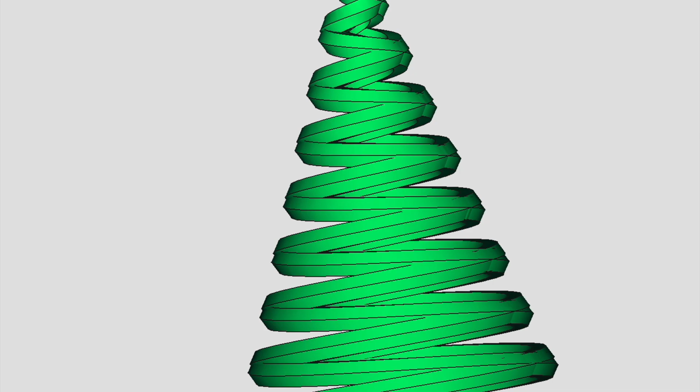We are in the wonderful world of FreeCAD and we're going to make a tree, a Christmas tree. I know it's the 18th of December, so this might be a bit late for some people, but maybe next year. In any case, the idea here is to design something, take a concept, show you that you can just do it in FreeCAD fairly simply, and then have it in your hands within a couple of hours, depending on the speed of your printer.

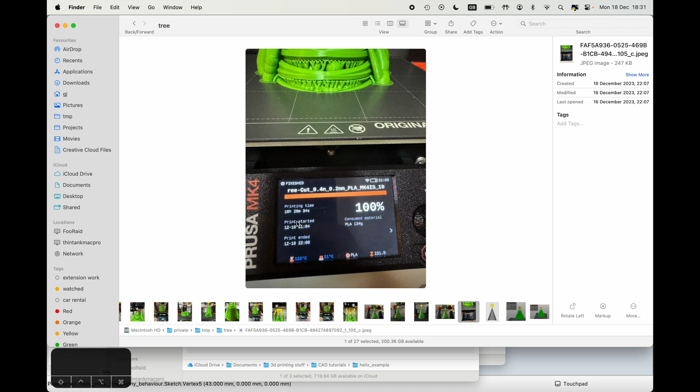I'm going to show you what we're going to end up with. Here we have the wonderful world of Christmas trees. This is what it looks like on the bed of the printer. Let's go back—this is what it looks like in FreeCAD once it's done. You notice the line there, that means we're going to have to sink it into the bed, but we'll get there. This took me 10 hours to print, but it's such a beautiful model.

I just want to share it with people. This is the last stages where the filament change has happened—you can tell that here and here and here. These are the supports, and then we end up with this monstrosity. Once you clear it up, this is me starting to clear up the bottom of it, and it looks beautiful. You end up with loads of supports, so if you can recycle that, that would be lovely. But this is what we're going to end up with, so I think you're going to love it.

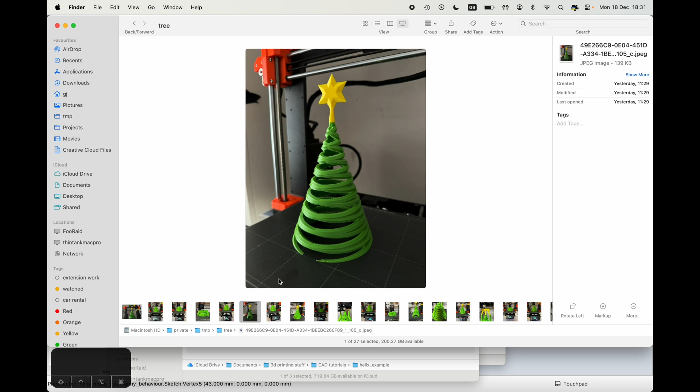So let's go back to the beautiful world of FreeCAD. I'm using FreeCAD 0.22, the dev version—it's a nightly build. At the time you're watching this, you might already see the latest, greatest version, so you might not need to download it from a nightly build repository. Essentially what we're doing in this tutorial, you can do on 0.21 and onwards. It's going to look mostly identical.

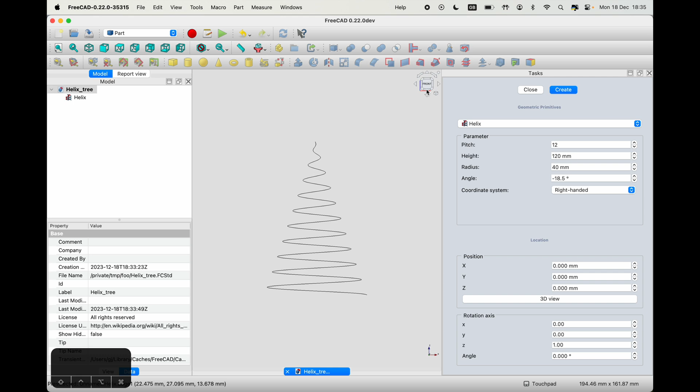So we're just going to create one. And there we go, we have our helix. Almost looks like the finished product, doesn't it? If you look from the front, this is what it looks like. The, 1, 2, 3, 4, 5, 6—no, I can't count. Anyway, I'm going to leave counting to you, but let's just assume that FreeCAD is not wrong in this case.

In any case, you just have to play with these parameters. What's great about this tool is it stays open. There's a bit of UI inconsistency in FreeCAD, but what can you do? It's free, it works. This allows us to create multiple of these without closing or having to reopen and re-enter all the parameters.

So I've created one that's right-handed. Now we want to create one that's left-handed. So let's do the same thing and say create. And voila, we have two of these.

I'm just going to move this out of sight. I'm going to change the line color to, let's make it green, because it's a tree, right? There we go. So we have two of them.

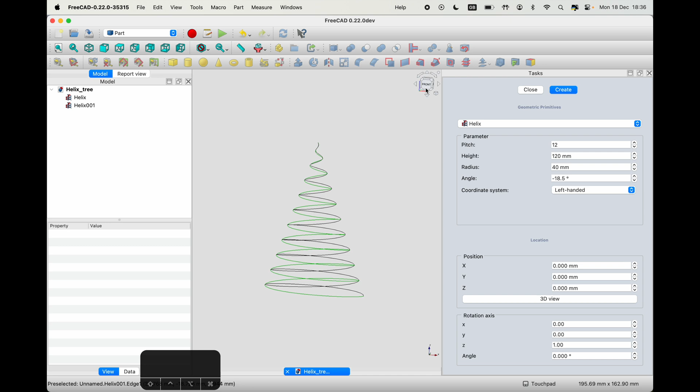If you look from the front, it kind of looks confusingly the same, but if you look around, we can clearly see that we have two helixes. And in the object tree, we have two helixes as well.

So we're going to close this workbench. We're going to save because we like to keep our projects. I'm going to go back to the front. And the next thing we're going to do is sketch a hexagon.

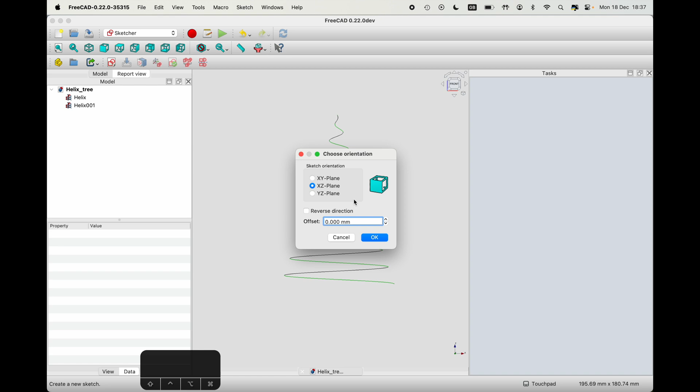So we're going to go to the Sketcher. There we go, thank you. We're going to say we want to create a new sketch, please. And we're going to create it on - you can't see it probably, but there's a little Z and a little X - so we want it to be on the ZX plane, or XZ plane. Thank you, and here we are in the magical world of the ZX plane.

If you didn't get that joke, I'm just going to explain it. Anyway, you get it now, right?

I hope so. This is going to be a shape that's going to basically follow these two helixes. And you can honestly do whatever you want. If you're doing it yourself, be creative. Don't just do what I'm doing, try something different. And in any case, this is CAD, and we can always go back and change things, which is exciting.

But for my example, I'm just going to go with, let me think - I think I'm just going to go with a hexagon because it's a bit more symmetric. But again, be creative. I think I did a star once, which is basically two triangles, but let's go with hexagon.

I'm going to put our hexagon in there somewhere, about 40 millimeters to the right, and we're going to make it a 3 millimeter radius. For the angle, we're going to say 0. There we go, and we have a little hexagon helix. We already have a helix or two.

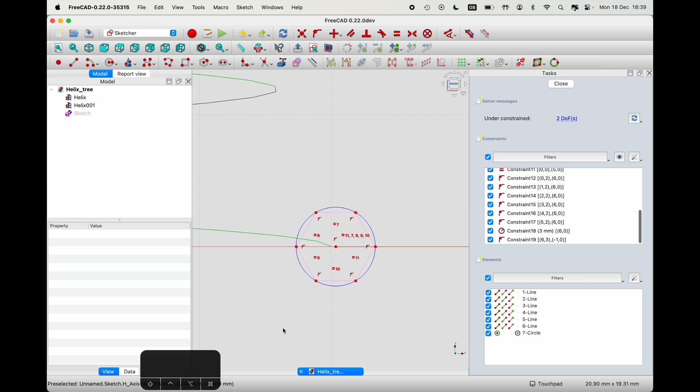But it's still complaining that it's under-constrained, and I like for things to be constrained. So let's go to the bottom - is this constraint on the axis? It is. So that was a redundant constraint. Control Z to take us out of that.

Okay, the next thing is going to be a dimension. How far is it from the center? This is, if you're using previous versions of FreeCAD, something different - if you look at the top row, I'm just going to pop that in. 40 millimeters is what we want.

Thank you. These constraint or dimensioning icons look different - they've been a bit more organized in this new version, which is something I love. Another difference you might recognize is the task panel is actually on the right-hand side. You can do that in previous versions of FreeCAD, but you have to set that up, whereas it's the default in the new one, and I actually kind of like it.

Anyway, going back, so we've positioned it 40 millimeters to the right. Why is it complaining then? What can I do? Oh, I can still rotate it. Oh, that's not good. So there are multiple ways to go about it - you can either take one of these points and restrict them to be on the line there.

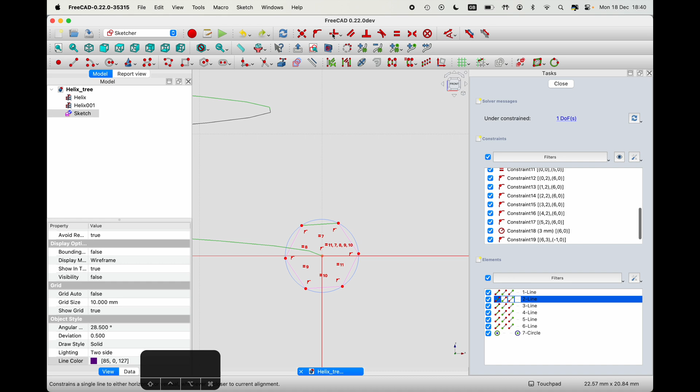But what I like to do is take one of the lines and make it parallel, or horizontal - so let's make it horizontal. In this case, this is one of the changes, it's going to make it whatever's closest, right? So, bloop, and there we are - it is now fully constrained. So we have our lovely hexagon, and we have our lovely tree.

Let's just make a shape. Well, actually, before we do that, I need to duplicate this sketch because we're going to have two helixes, right? So it's quite easy. Copy, Command C, and Command V copies and pastes. Obviously, on your platform, I'm on Mac OS, this might be different, might be Control C, Control V, whatever. Or you can use your menus, but it's much quicker to do things with the keyboard shortcuts. It's the mega user, ultra, uber user way of doing things.

So let's hide two of these because we don't need to see all of them. Take a sketch and let's take a helix. Now if we go back to the part workbench, we're going to look for something called lofts, or sweep rather. So let's sweep. We're gonna pick a path, so the helix is our path. Let's press done, and the profile is going to be our first sketch. So let's just push it here and... select one or more edges from the single object.

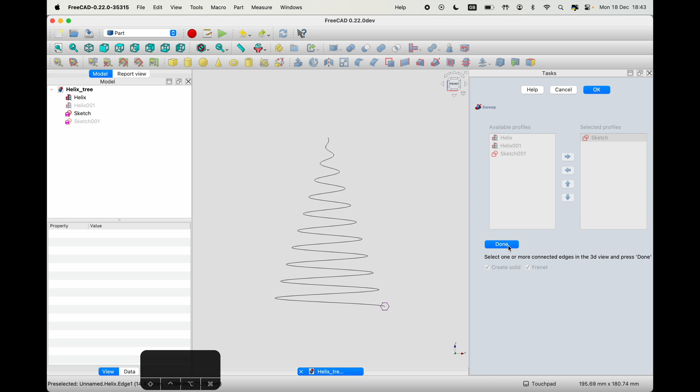What did I do? Oh, we're going to create solid as well. Is anything happening below? We did pick a path, we said yes, we say okay. A bit of trial and error. Workbenches are a bit inconsistent when it comes to UI in FreeCAD between workbenches and some of the tools, but trial and error, right? Let's save this, we have our first sweep.

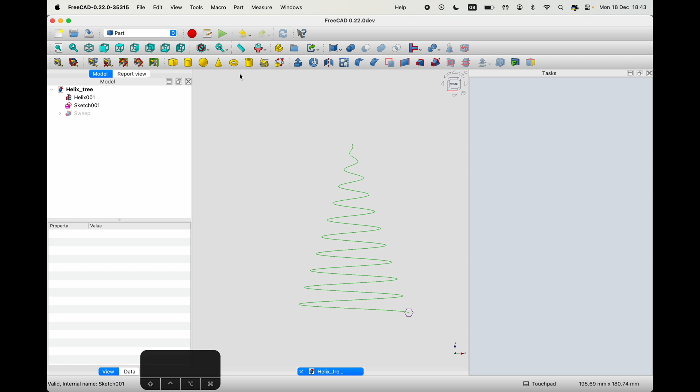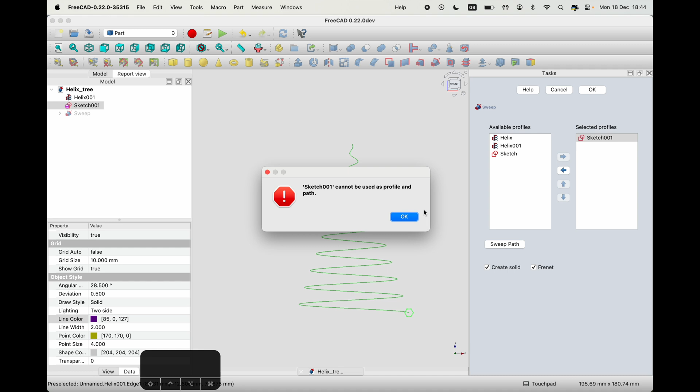Let's hide this for now because we don't want to see it. It's obviously at the bottom now because that's the latest item. Inside of it, we have Helix and Sketch, which are still showing. We don't want to see anything at the moment, but we want to show the other Sketch and the other Helix. Let's do the same thing. Let's just select the Helix, select Sweep, sweep the path, yes please. Say done, we want to use the Sketch 1. It looks like we could have used the other one, but let's just do it that way. Create solid, please. Okay, no, sketch cannot be used as a profile and path.

I think you're mistaken, sir. There you go, I'm done. Yeah, yay. I think it just thinks that I've picked both of them, but it doesn't matter. We now have two of them, two little things. And from the right hand side, you can already see that this looks like the tree. In fact, this is pretty much the tree. It's the magic of sweep.

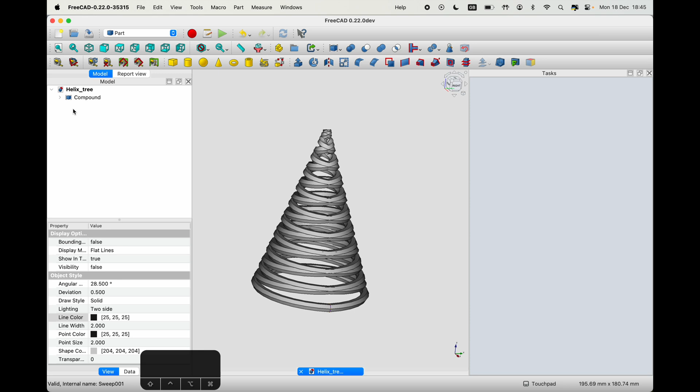Now, I spend a bit of time merging them, and honestly, I don't know if this is going to work. So let's just try it. Compound tools, yes please. Oh, we have a compound. Great, that actually worked the first time. That's never happened before.

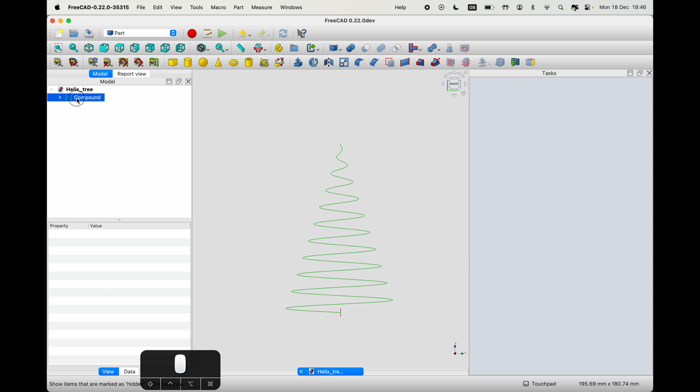What does the Christmas tree need next? Oh, actually, in fact, first the other thing that we want to do is we want to change its appearance. We would like this shape to be green, please. Santa, Santa, please, sir, please. There we go, it's green. That looks better. Now it's entirely up to you if you want to put stars on it or anything else. I'm not going to go that far in this tutorial, but you're free to do whatever you want.

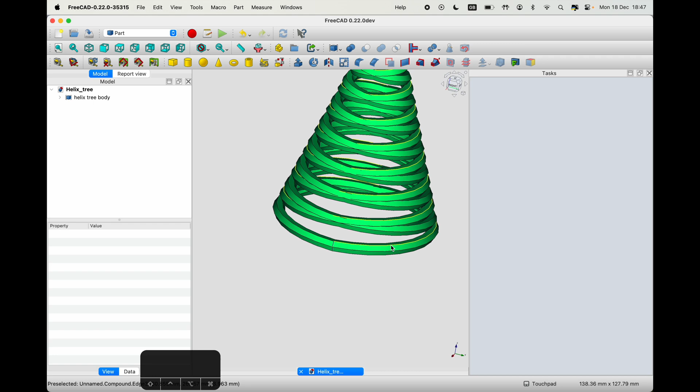Next, we're going to make an STL. So we have our merged helixes, and we have our Christmas tree, festive, unique, and ready for 3D printing-ish. If you're familiar with 3D printing, the problems here are obvious. It's the shallow angles, that's not going to print very well.

However, if we go to a friend, Prusa Slicer, I have one that I prepared earlier in here, and in fact I did a split of it, but this is an STL that I created earlier. You can see that you have to enable support on build plate only, and as soon as you do that, you get loads of support, and I mean loads.

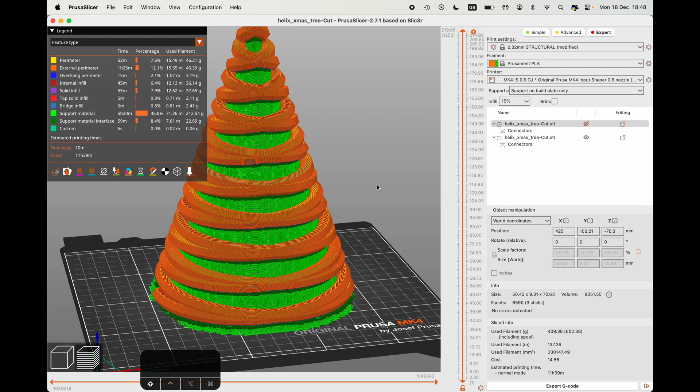This is enabling us to print this, but it creates a bit of waste. Sadly, that's how 3D printing sometimes goes. Anyway, so this is something to look forward to.

But you probably want to see how to make the star, right? Have you ever made a star? Are you a star in the making? Ha ha. For this, let's go to part design.

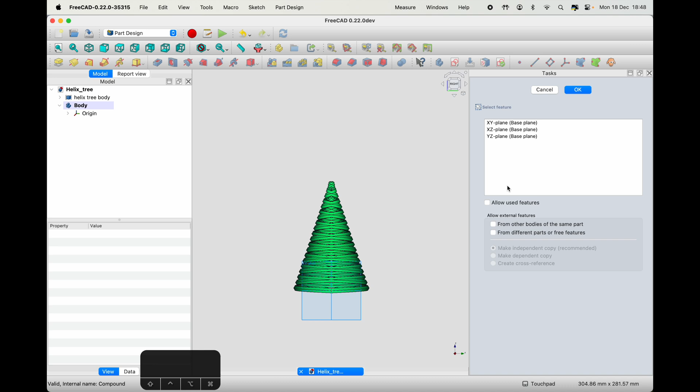And we're going to have a new body. Sometimes it's confusing because things are on the left normally, and now they're on the right. Create body, we want to have a body, and we want to create a sketch. Once again, we're going to have our sketch on this plane, whatever that was, the YZ plane.

Let's close this for now because we want to be able to—actually, let me just rename this to be a star first. And let's reopen our sketch. Here's a great thing: we want to be able to reference the helix underneath to get the height. I mean, after all, this is a parametric design, right? So you should be able to change things.

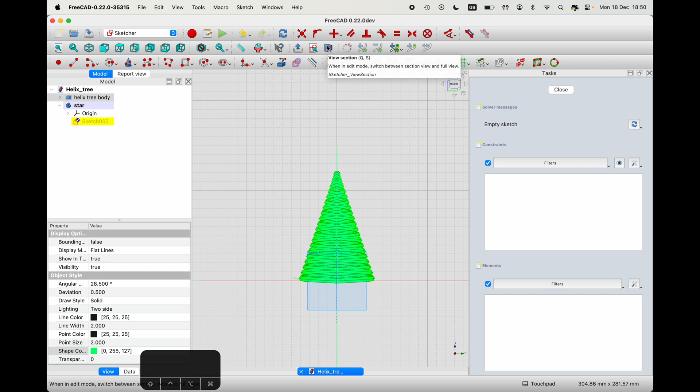Luckily for us, we can do that, if I could just remember which one of the icons enables it for us. I mean, it's not really necessary to do it. I think it's this one, view section. Hey, I found it. It's very helpful to sometimes just hover over things, and you eventually find it. The other way to do it is basically just go via menu.

You notice these letters here, which means we can get to things quicker. But for the purposes of the tutorial, I'm going to try clicking on things just so you can see what I'm doing. Basically, we want our star to be somewhere here, and then we want to have a little cone that basically extends the tree and kind of pokes the star in, and kind of connects everything together. So what shall we start with first?

Let's in this particular sketch just have our little cone. So we're gonna go—how should we do this? This is the bit that I haven't rehearsed. I've done it once, and I think that's enough for me.

Let's make a triangle. Just say we want it to be in the middle, and whatever. Let's just put it there. There we go, thank you. You can change things, right? Actually, we don't want a triangle to be on the circle.

This is a construction circle. You can just select it and then press, in my case, Function and backspace, which is the delete key, and off it goes. The trouble is now this is going to be dancing around.

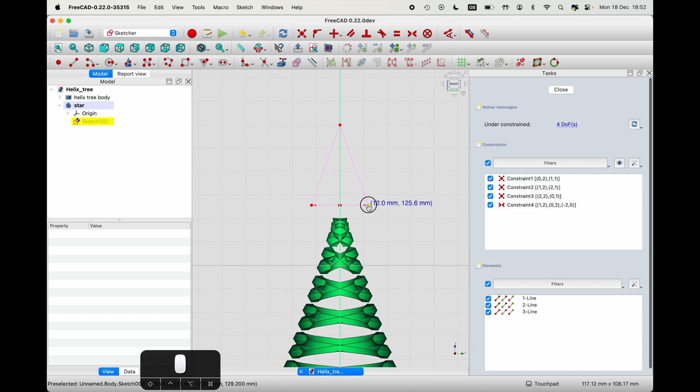So there we go, that's better, that's better. So I don't know if you remember, but we said our height is 120 millimeters. I'll actually forget this, let's not do maths, let's not make things too complicated. We can just say, okay, well, we kind of know that this is going to be.

I don't know what it just did, it just made a constraint that I didn't need. I want to have a distance here. Thank you. So this is telling us 5.8. Are we going to believe it? You can obviously make it whatever you want.

It doesn't have to be a cone, you can make it whatever you need. But we're going to make it a cone in our instance, and we want this to be there, please. And I'm going to constrain it onto the Z-axis as well. There we go.

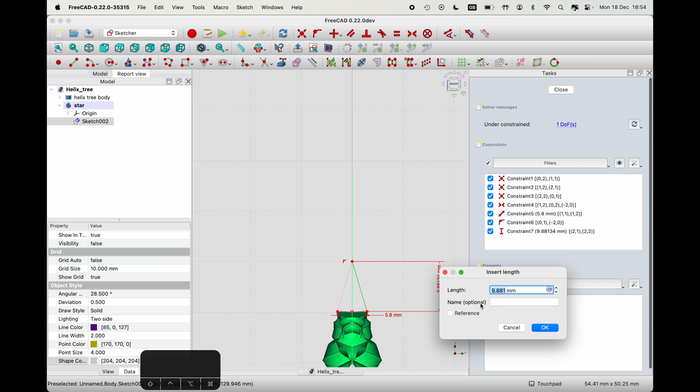Now let's make it this tall. We do want to know the height of it. Let's just make it 10 millimeters tall for now. We can come back to this and change it, but it's useful to have it.

And now, if we take this sketch and do a revolve—not groove, but a revolution, actually it's called here—revolve axis intersects the sketch. That's not good.

Actually, I think I know my issue here. So we've done a boo-boo. If you're watching this and screaming at me, I'm sorry. I'll give you your money back.

Let's put it there, and let's do it there, that's better. This has been constrained. We have to do the dimensioning again.

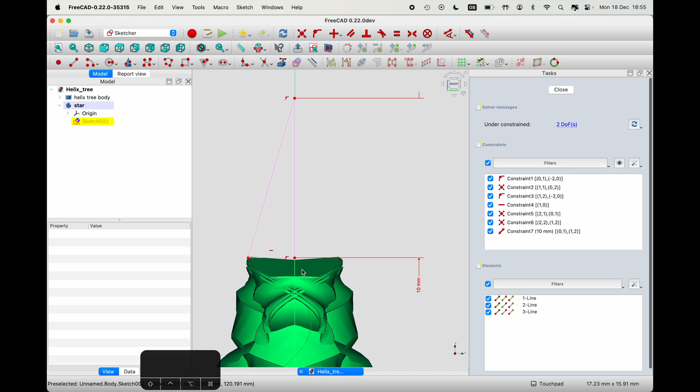Luckily, it's still 10 millimeters, so it's fine. And we need to constrain this diameter. This is all to help us in the future. We want this to be 2.8, please, in case we want to change anything.

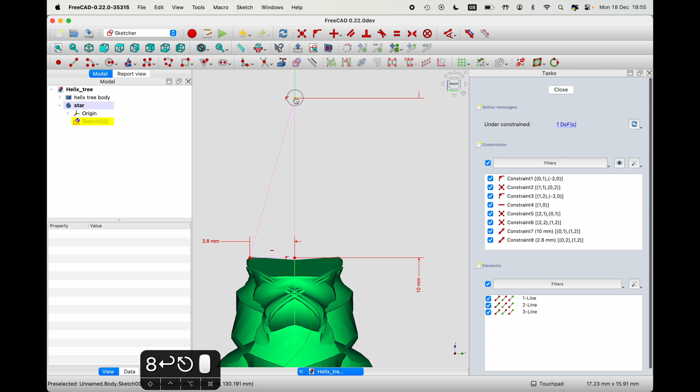There's still one degree of freedom, it helps to just jiggle things. So for this, we want the cone obviously to start at the top of the tree, but we can come back and change the shape or size of the helix, and we want this to kind of follow through. The trouble is we have two helixes and they're not connected to each other, so things could get dicey. But let's just say this is obviously 120 millimeters because that's the height of our helix.

Now, not exactly, because you notice there's a bit of sticky outy bit here, because our hexagon is 3 millimeter radius, so it depends on what edge perked up there, but it should be sufficient. Yeah, that should be enough for us to work with these.

What you can do in FreeCAD is go in here and change this. I don't know if I actually can. I want to get my helix tree. Helix, no, it's not going to let me. Oh well, forget about it. Helix tree body, no, we can do it. We want to go to our shape.

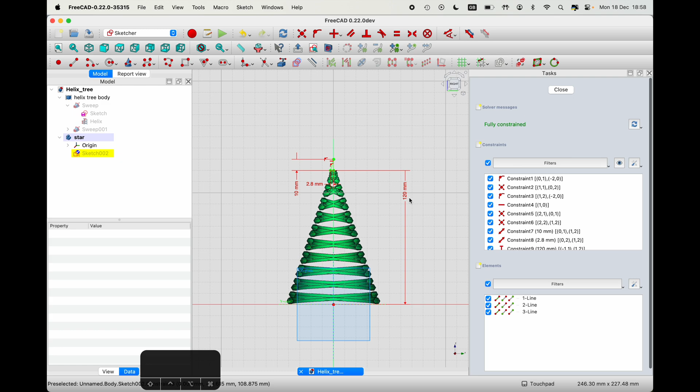We are making a star. This is a star in the making.

Revolution, this should work now. We have to pick a Z. Yes, please. Let's zoom out and let's observe our star cone. It's our cone. Beautiful, isn't it? It's like no cone before.

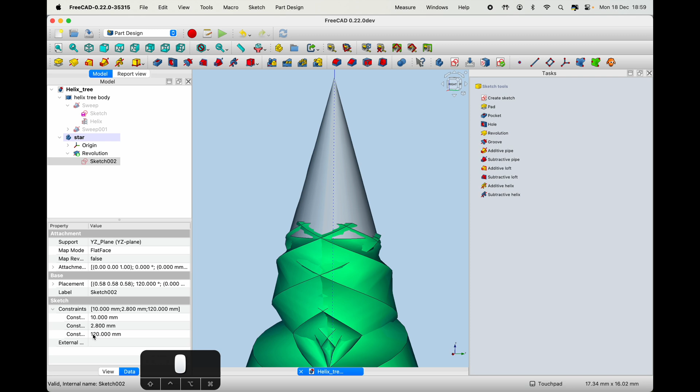It does kind of protrude into the tree, so let's just edit our sketch - we don't even have to open it, we can just say here, actually I want this to be 123 millimeters, please. No, that's too high, 121. That's not, it's just ever so slightly touching it. Maybe we do want it to be 120. Maybe we don't do it actually, we do want it to be 119.

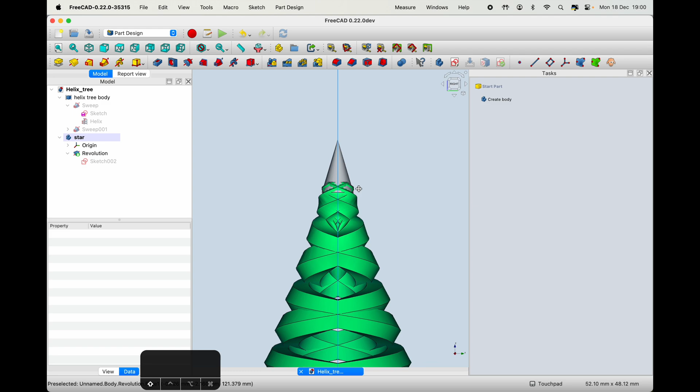At the end of the day, we're all going to merge all these anyway. And whilst we're here, we can change things - this is the beauty of parametric design. I love this stuff, you can just change things and watch it change in front of your eyes. It's amazing.

It's beautiful, beautiful, beautiful. Try doing that in Blender or any other 3D design programs, that's just not possible. But then, you know, it's all for different purposes.

Let's just go back. No, stop dancing. So we were looking at things from the right hand side, please. There we go. And let's turn off the origin, we don't need to see it. But now we have our cone.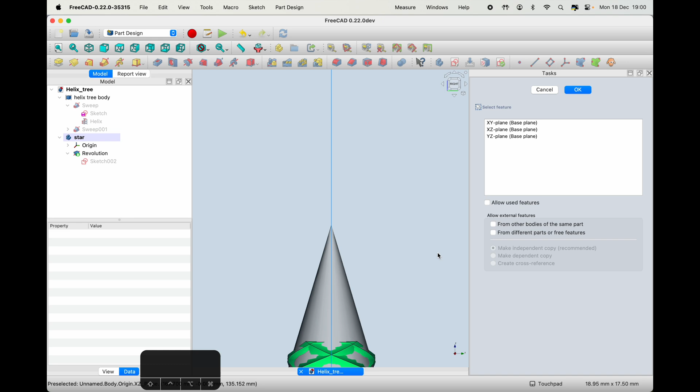However, our tree is not completed because we want to have a star. We need to have another sketch. This time, we are going to sketch it, or we want our sketch to be on this plane, please. So Z, Y, Y, Z. Thank you. And obviously, we want our star to be somewhere here. So how do you create a star?

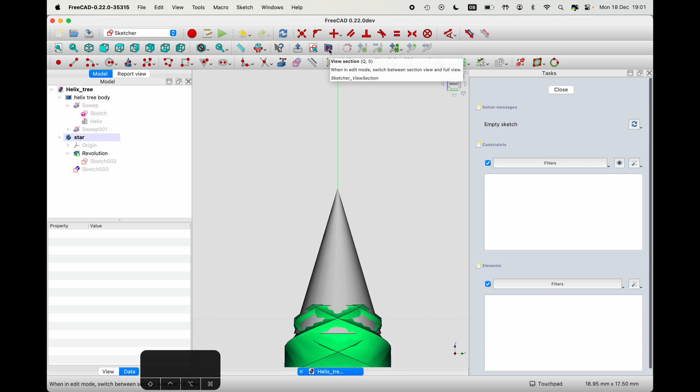But first of all, we need to be able to kind of see once again, sort of X-ray this cone, right? And if you remember, we need to do this, which is the view section. So Q, S. How beautiful! How beautiful!

It's very confusing, but doesn't matter. We want to borrow the references from this part of the revolution. So for that, we have to use this icon, which anytime I look at this looks like a detonation box.

But if you look carefully, it's just a box with a little arrow pointing at a line. So let's just do that, and we want to be able to get this and that. No, can we do it this way? Oh, I think so, I think we got it. Hey, it's complained about something, but that doesn't matter. We got our points, that's what matters.

So I don't know how you would create the star, but the way I'm going to create it is using something called a triangle. I know nobody's ever heard of triangles.

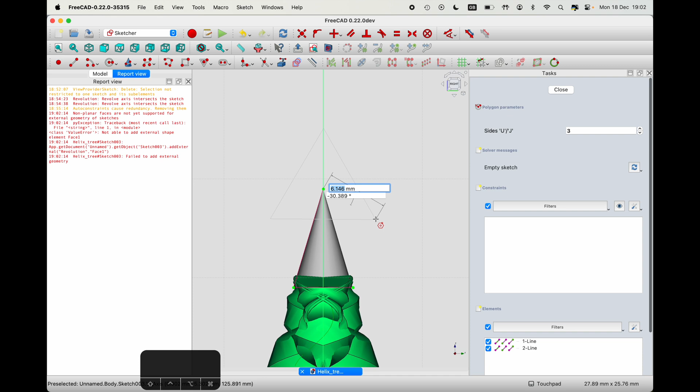Once again, we're going to get our triangle. Let's just have one sort of this way. I actually can't remember which way I've done it. I think I've done it this way. Let's make it 6 millimeters, and let's just say 0 degrees for now. So that's one triangle.

And we want to have another triangle sort of at a funky angle, right? So we actually want this to be at this sort of angle. So we literally just want this to be attached to this. Or earlier we can just make this horizontal. There we go. And now we want to have another triangle.

The trouble is, if I draw another triangle now, see what happens. If I draw another triangle here and make it 6 millimeters as well, or whatever the other one was, doesn't matter at the moment, and we can put it at whatever angle we want. We get another circle around it, and we don't want two circles. That's confusing, we want them to be referencing the same circle. So let's just pick that circle, the second one. Function, backspace, and it's gone.

And we end up with 4 lines. Is it going to let me drag them all together? No, that would be too easy. Let's not make things too easy either. Sometimes you have to work for your beautiful designs. That's okay, so let's just bring it down.

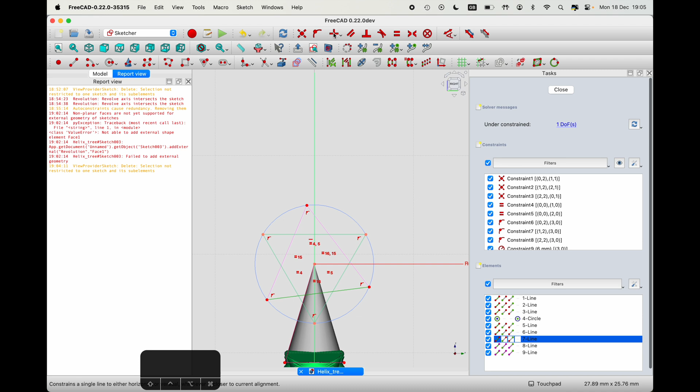And let's make sure that this point lies on this circle, and this point lies on this circle. Nope, nope, I think I picked more than a point. There we go, circle, please. Thank you. And this point and this circle. Yes, yeah. And now we're going to make this one horizontal as well. And there we go. We have something that resembles a star.

But there's a problem, we've got some extra lines, right? So if I was trying to pad this now, it's going to complain. It's going to say multiple solids are not currently supported, so we can't do it. However, we can deal with this.

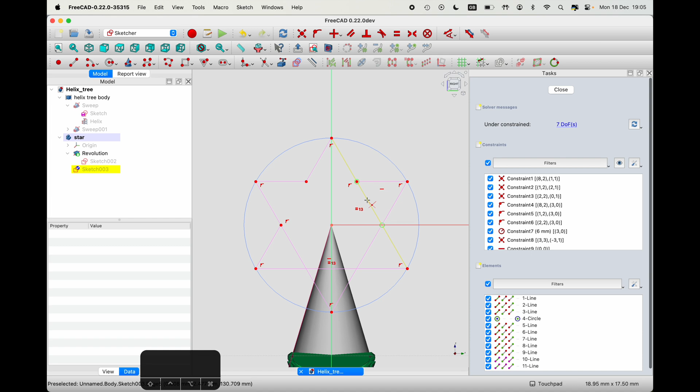So this is a very useful feature, the trim edge. If you hover over an edge, you notice there's two circles on either end of this line. That tells me where it's going to perform the cut. So, bloop, bloop, bloop, bloop, and because now, because we imported the extra things, it assumes that we want this line to be a thing as well, which we kind of do, but not for this. Anyway, we have our star.

As you can tell, it's under constraint. So, did we constrain the diameter we have? But our star is under constraint because we've basically removed all the things that were constraining it. So if you think about it, you can now just jiggle each individual point.

So what I do is, and everyone has their own way of dealing with this, but this is what I do. Again, open to suggestions, if you know a better way, do let me know in the comments. So I picked external points and then the middle point, and I can just click on this icon, which is the symmetrical constraint. Bloop, and all of a sudden we're down to 14. If I do this for each one of these,

Oh, sorry, I didn't pick the middle one, my bad. Now we're down to 10. That's better than whatever it initially was, but we still have a problem, right? We still have dimensions to deal with. So now, if you pick a number of these strategically and make them equal,

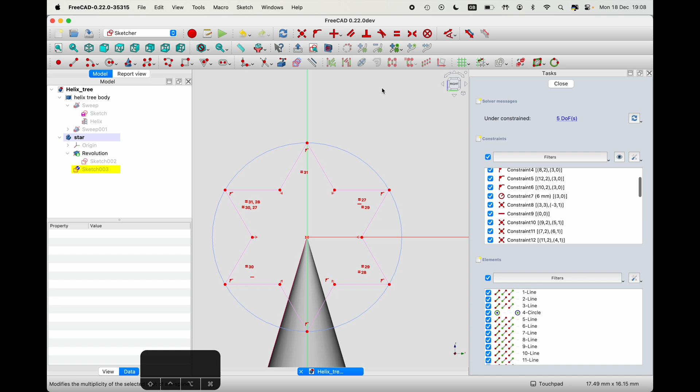So something is still under constrained. Oh, I think I know what it is. No, I thought I'd be able to drag this. Oh, there we go. So I can make funny shapes with this, which is obviously not what we want. So let's pick this point and this one, this line, and constraint point onto the point onto objects. No, I didn't like that. Something is still moving around. This is sometimes a bit of a guess game.

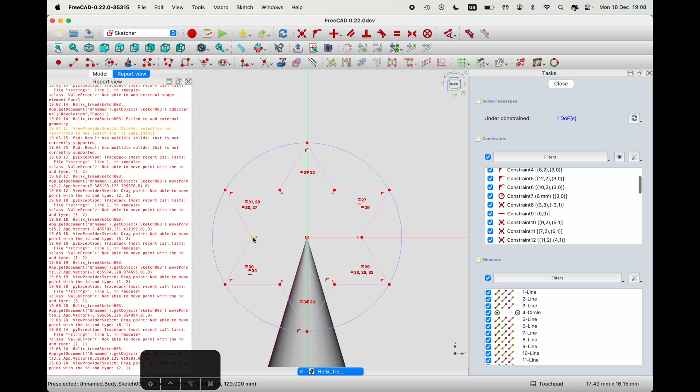In theory, the colors should change. Ooh. So this dimension, let's just keep it whatever it is. This is obviously, I could make this, what happens if I make this a 3?

Good. Okay, let me show you something. So you can say, okay, well, the circle that we have here has a constraint, which is its diameter, which is right here. We can give it a name. We can give it star radius. Let's just make it one word.

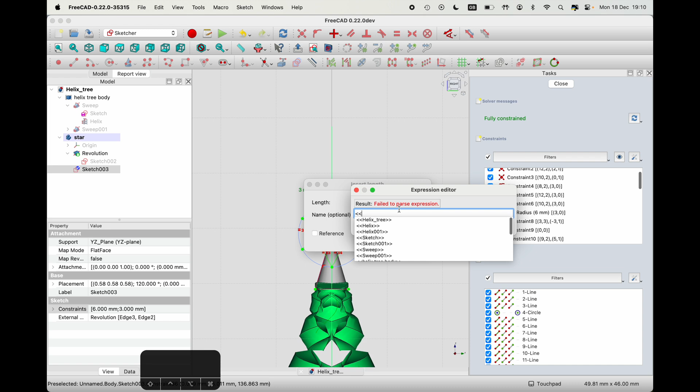And in here, I should be able to say star, oh no, sketch 3, which is where we are, and we say this is a circle. Do you know what? I might not be able to do this. Again, I might leave this for you as an exercise. There is a circle in here somewhere. Doesn't matter, let's just not go there. This is a bit more advanced subject, and I'm not going to do this.

We do now get loads of constraints, which might be a bit confusing. You can hide constraints if you want. I'm not going to bother. As soon as you zoom in, it's obvious what's going on.

So we can now close this and say pad, and pad. We have a funny looking star. We want it to be symmetric to the plane. Thank you. And here's a beautiful thing, we can taper it. Obviously, we don't want it to be 10 millimeters, I think that's a bit extreme. Although, let's just make it, I don't know, 8.

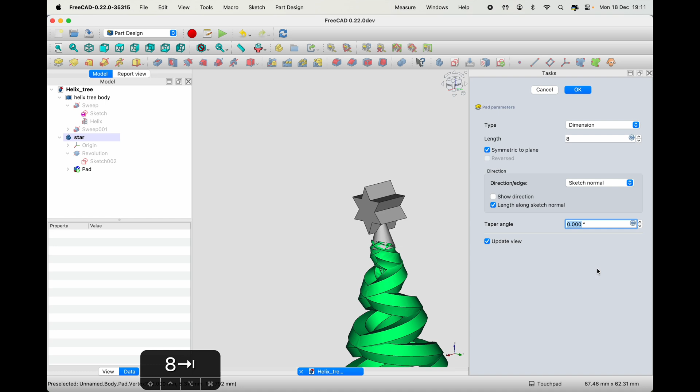And say minus 10 degrees. No, maybe minus 12, and reduce this to 5. Does this look right? This is the, going by the, whether it looks okay to you, sort of way of doing things. Let's just say minus 16. I honestly can't remember what I did for the other one. I just kept on playing with it like this. And at some point I have arrived at something I liked.

And there, it's executed the pad without me actually wanting to do that. Is this something we like? I'm not sure, I think the cone looks a bit fat. Let's change it, let's go back to the other sketch. This is the beauty of parametric design, it doesn't matter, you can change things later.

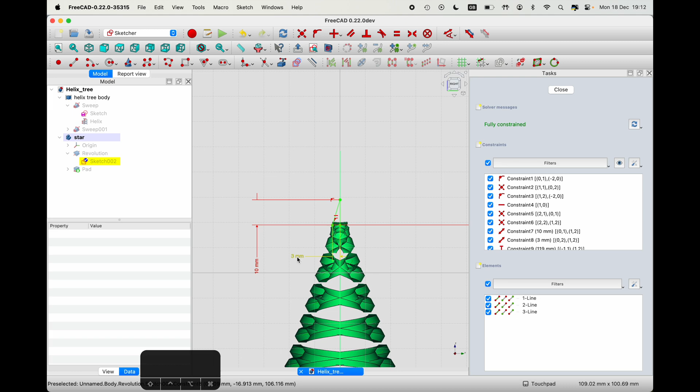So maybe this cone is actually not long enough, let's make it 12 millimeters. Thank you. No, that looks a bit more ridiculous. I think the star needs to be bigger, let's make it 8 millimeters. It obviously now looks a bit funny, so let's make this 4 millimeters, or maybe even 4.5 millimeters.

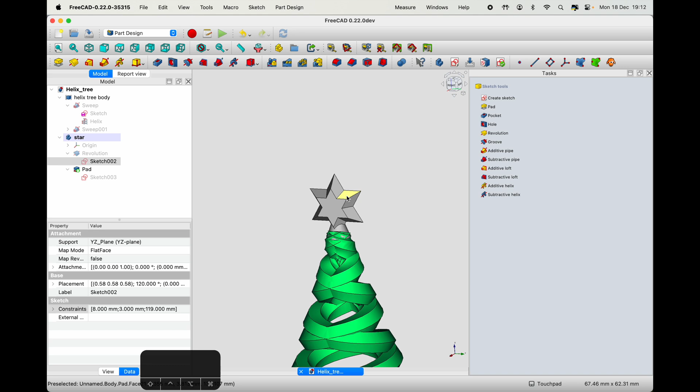Hey, I like it. It looks a bit fat, this, sorry, it looks a bit strange, this cone, so let's just make it actually 8 millimeters and see where this does, where does it get us?

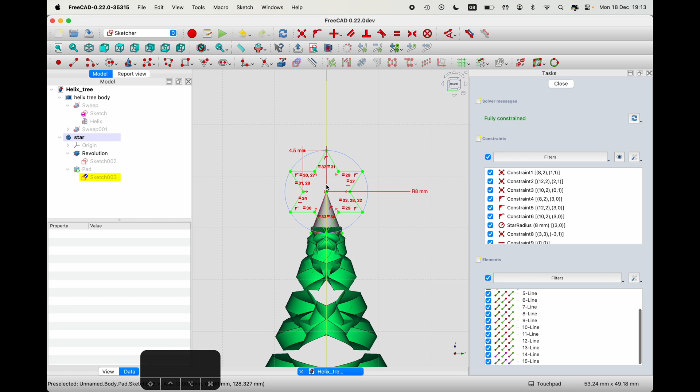I see what's happening. So the star is obviously referencing the top of the cone, right? So how do we break it away from the cone? It's a good question. If I wanted to move this higher up now, I'll have to find a constraint, the equal constraint. It's going to be one of the first ones because we just did it that way.

I think it's this constraint. Let's delete that constraint. And we can now move it up and down. There we go. Can we move it sideways? Ooh, funky things are happening when you do that.

But we can say we want there to be a distance between these 2 points. And we want it to be... We want it to be, say, 2 millimeters. But we also would like this point, please, to be on this line. Otherwise, things look silly. Oh, yeah, that's better.

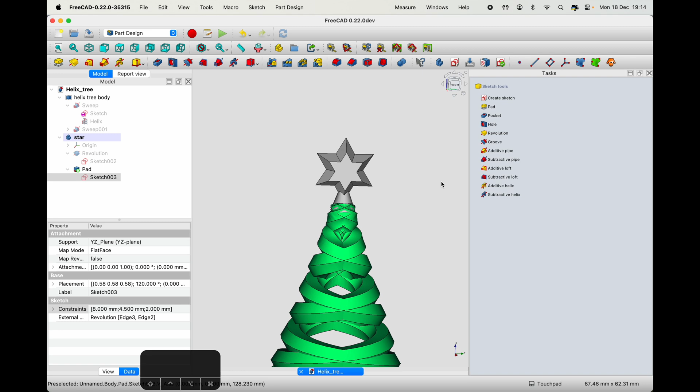Bloop. Hey, look at this. We got a star. I mean, if you look at the whole thing, it actually doesn't look too bad. And if you think this looks too bad, I mean, you can design your own, right? This is what this tutorial is all about. See, once you change the colors of things, all of a sudden it looks very fitting.

Beautiful, beautiful, beautiful. Now, I think this is something I didn't cover in my own model, but I think we need a base. It's all about the base.

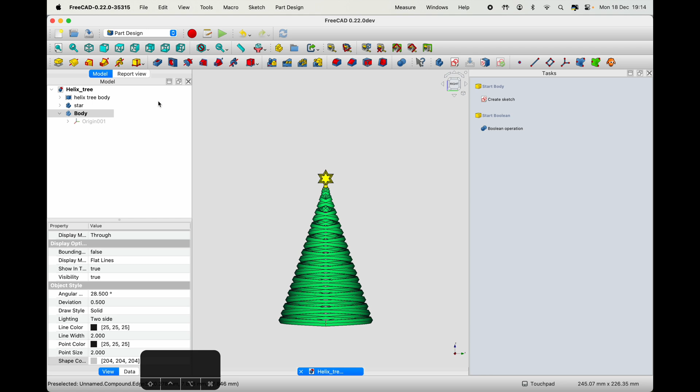There's a couple of ways to go about this. You can create a body in Part Design again, or go to the Part workbench where there are predefined solids you can use to create your own shapes and primitives. On this occasion, I'm just going to go back to Part Design, but you don't have to do it that way. Sometimes when you just want to create a simple box, you can do it in the Part workbench. But this time, let's go back to this one and work on this.

We want to hide both of these. We don't want to see the helix - one of the helixes is sticking out. Thank you. So we have a sketch.

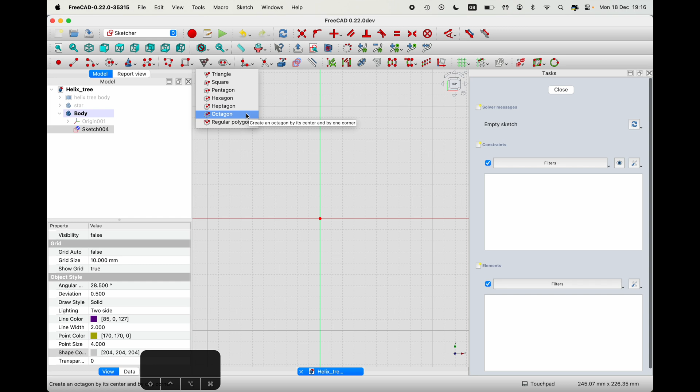We know it's roughly 40 millimeter diameter. Let's have an octagon base, because why not, and let's make it 45 millimeters, with the angle at 45 degrees. There we go. There's still one degree of freedom, which I don't know what it might be, because generally this thing tries to be very good, but obviously the angle didn't get restricted properly. So strange, anyway, doesn't matter. We can fix this very quickly. Very good. Close. And we have our beautiful sketch.

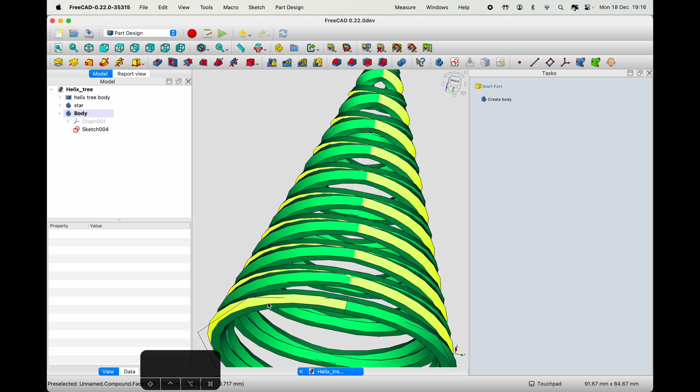Now, if I enable the star and the helix, you notice this cuts right in the middle, which is what I want, because this isn't going to sit flat on any bed. So I want the base to actually cut through the bottom of this tree. Otherwise getting it the right way is a bit more complicated, and honestly, ain't nobody got time for that.

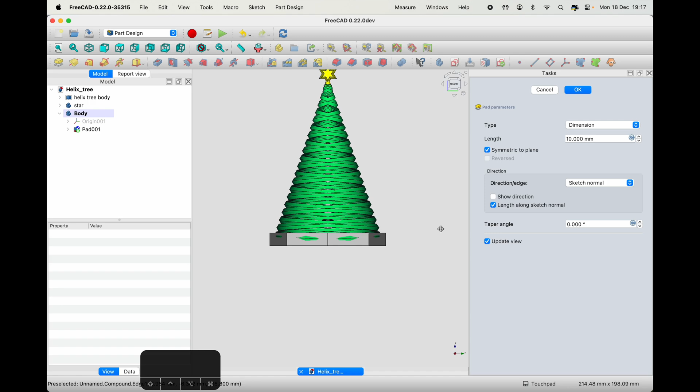So we can take our sketch and pad it, but we don't want it to pad this way - we want it reversed, please. Actually, we can even do it symmetric if we want to, and it's still sticking out a little bit even though we did it 45 millimeter. Interesting. We can go back and change that. Let's make it 10 millimeters, because why not - we can do whatever we want.

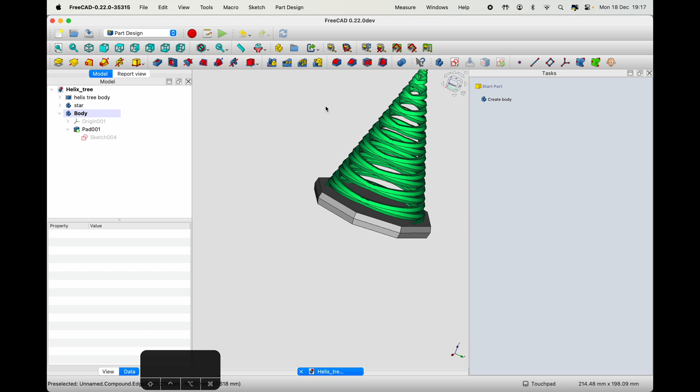What I like to do is add a tapered angle to it, because it looks a bit more funky that way, more Christmassy. I'm going to leave it at that for now and go back to my sketch, and make it 50 millimeters, because again, I can - that's the beauty of parametric design. You can go back and change things you've already made.

So now if we look at this from the front, it's going to look like this. But we're going to presume that nobody's going to watch it from that angle. So this is our tree. Ain't that beautiful? And obviously, how much it sinks in and all that, you can adjust.

Let's rename this to be the base, and let's change its color from the boring gray to black, because that kind of accents the rest of the tree. And I think that looks magnificent. That looks amazing, if you ask me.

So, are we ready to print this? Well, I'll leave the design to you, but I've already printed a couple of these. And spoiler alert, it takes quite a few hours to print one of these.

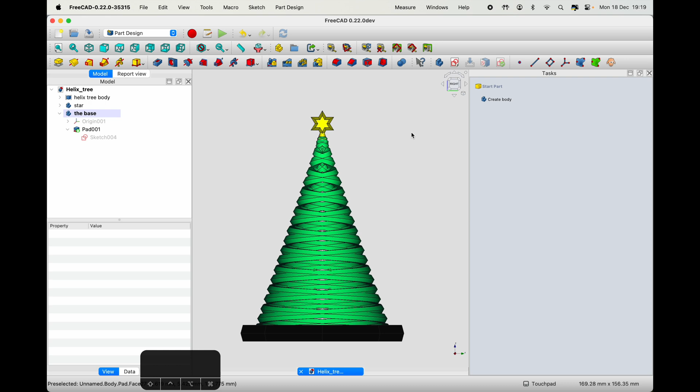What we can go through very quickly - I'm at the very end of this video. I'm going to show you a time lapse of this printing. But before we get there, would you like me to walk you through PrusaSlicer and slicing this up? Or is that something you want to just forego? It's up to you. If you're bored already, get yourself a cup of tea and come back. But leave a comment down below before you go and tell me what you think - isn't FreeCAD awesome? Because I think it's amazing.

Now, to export this, you can export each one of these items separately, but that would be silly since we have the base integrated with the rest of the tree. So what I'm going to do is select all three and say export, helixtree.stl, yes please. Now we're going to go to PrusaSlicer.

I'm going to close this and say new project, please, discarding all the extra things I've been playing with. Now I'm printing this on a Prusa Mark IV with the 0.6 nozzle, but this is going to work on most other printers, no worries.

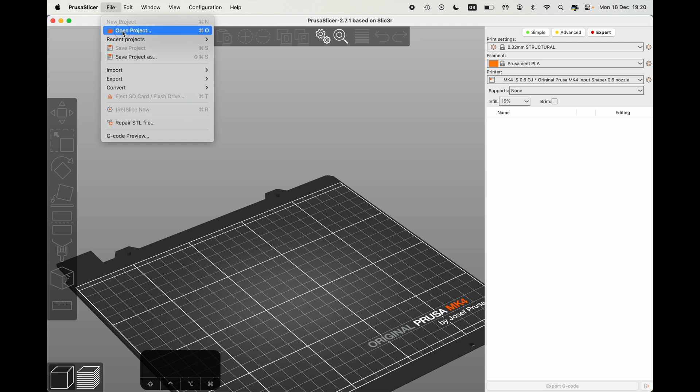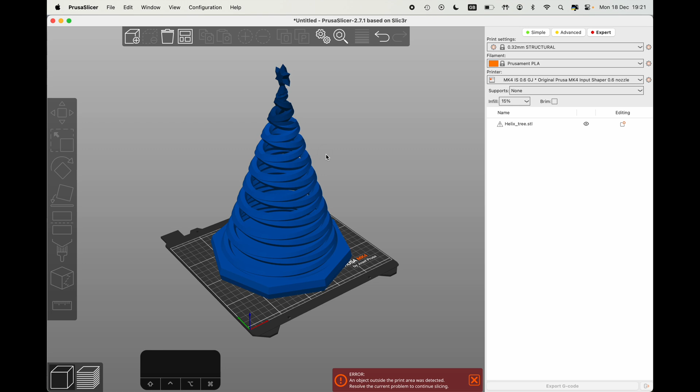Not to worry. When you work between PrusaSlicer and FreeCAD or any other software, the shortcuts are different, which is sometimes confusing.

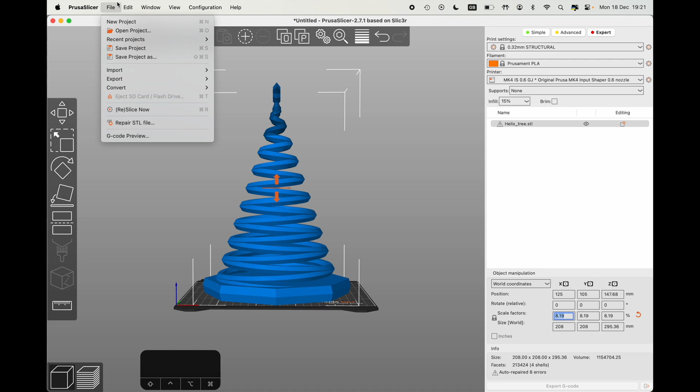But you can do scale in here. Interesting. Let's do this again. Let's say new project, don't save, import STL. See, I've never had this problem before because I'm recording a tutorial. There you go, when you don't tell it to import it - I must have clicked on something strange.

Oh, it said imperial units. Who cares about imperial units? They're outdated. Nobody should be using imperial units in 2024, 2023. Nobody, honestly.

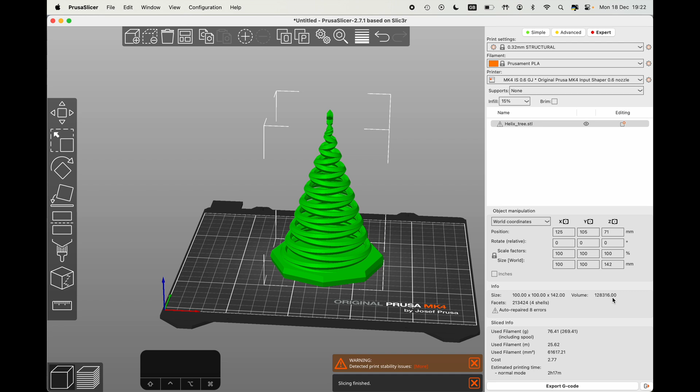So here's our tree. It's obviously at a slight angle. They're orientated in the wrong way, but we can fix this very quickly. We can just say, I want you to rotate it 90 degrees on the y-axis. Nope, that's a mistake. I want you to rotate it on the z-axis. I think so - yay, that's the one. Obviously the z-axis is the one going up and down and rotating around it. That's the bit I didn't quite articulate.

But if you look at the slicer, it's obviously going to say there's an issue - floating bridge anchors, loose extrusions, consider enabling supports. It's very much a right, because it shows you in blue the bits that are kind of funky. Overhang perimeter, that's not going to print very well.

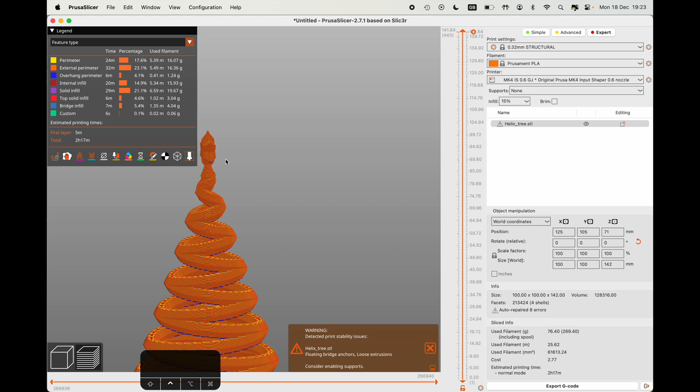So we have to enable supports. But the problem is one of the things that's hanging off is our star. So if you look at it, these bits there in blue again, they're not going to do very well.

So we can say enable supports everywhere, but that creates another problem. Interestingly enough, it didn't actually do what I thought it's going to do - it's not going to create supports the way you think about it because of the base. So in my case, I printed it without the base, but it depends on how big you want it.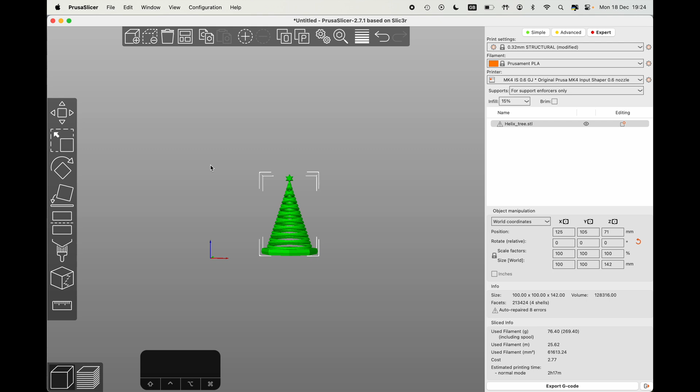So in PrusaSlicer you can do this cool thing, and nobody's going to know that you did it. Trust me, I do it all the time. You can just sink things into the base.

It shows you in white the outline, the bits that are resting on the bed, and you want that to be big. So that's great. Now...

Sorry, I want it to be everywhere. Yeah, so now it's created all the supports, but obviously it's a lot of supports. This is just going to take 2 hours and 38 minutes - actually not too bad. However, this is a fairly small tree, right? It's 128 millimeters, that's about 12 centimeters.

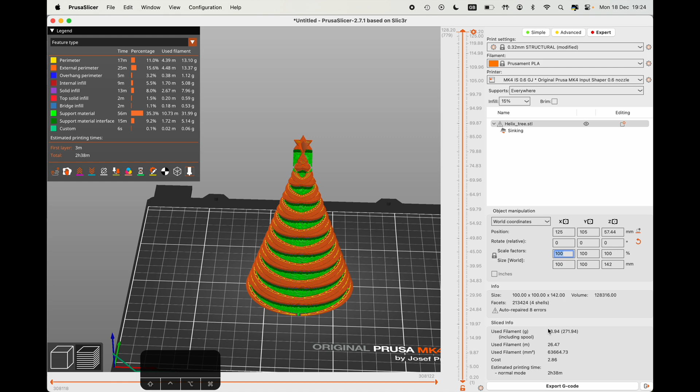Let's say we want to scale things up. Let's just make it 50% larger. That's gonna wreck our sinking, right? Because it made it large, but we can fix that.

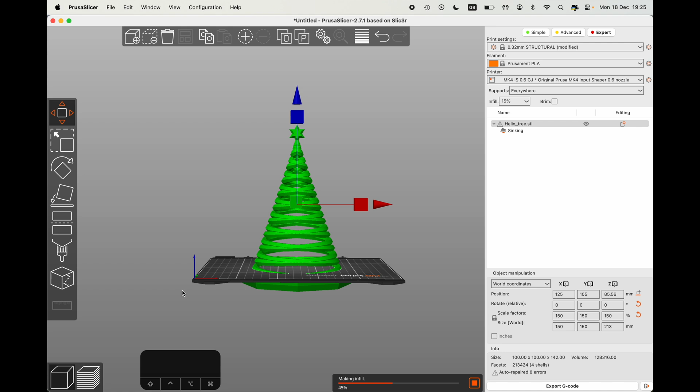Again, I'm looking at the white outline and just trying to maximize this. I think that's good, maybe ever so slightly higher up. There you go. You want to have a solid base. And now it's 193 odd millimeters.

That's not too bad. Let's make it slightly bigger - let's make it 160. The trouble with the scale percentage is that it gets out of hand very quickly, so you have to be careful with it. Like if I go 170, that might actually be too big.

You may say, 'Oh great, but can you just not make it bigger in the CAD?' Yes, I could - that's also one other option, but we're not going to do that because we're playing with the slicer now, just to show you what to do here.

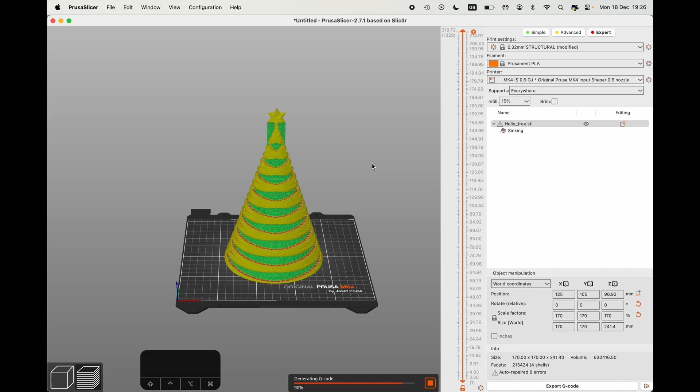There we go, that's our beautiful tree. How long is it going to take? 9 hours and 38 minutes on this particular printer. Obviously if I change to a smaller nozzle and smaller layer height, that's going to take longer.

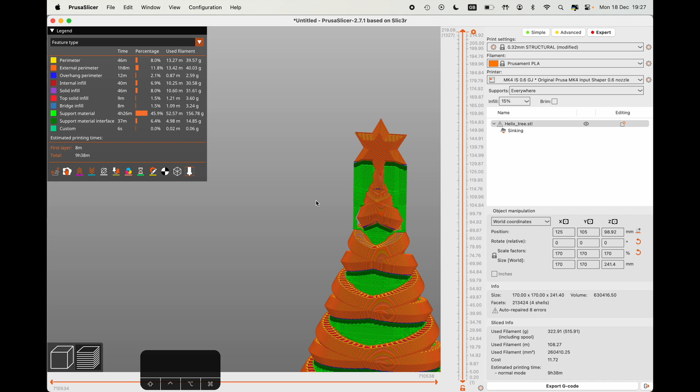But the problem here is that our star is kind of - it feels awkward, right, to have all these supports just for the star. And obviously we would like our star to be in a different color.

So in PrusaSlicer you can go back in here, and the way I do this is I'm looking at this and thinking, when did the profile change from this one to round? Where did our cone kick in, right, into position? And I can kind of start seeing it somewhere in here. Or not, maybe.

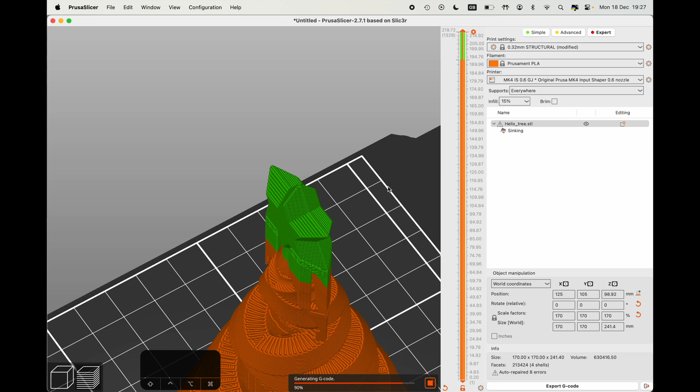And there we go, so I can just do the plus and our star is now a different color. Doesn't matter what color it shows here. You can change that color if you wanted to, but let's not be too paranoid. Let's do the rest of the tree in green, and let's do this one in yellow because we can. There we go, so that's one way to do it.

But the other way to do it, which I think is just amazing - 2 to 3 years ago this is something you would have to do in other software, but you can now do this in the slicer, which is just amazing. And there's so much more you can do in the slicer, it's truly magnificent.

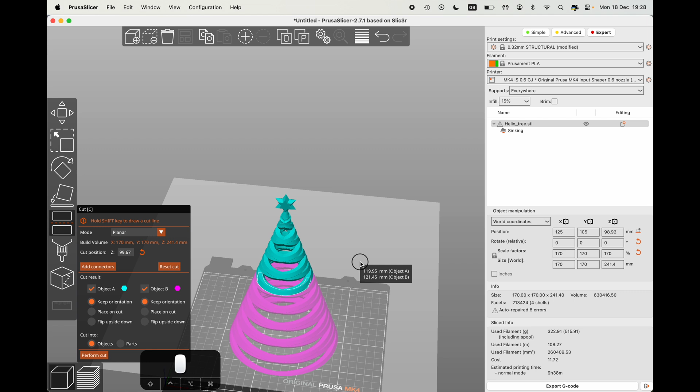But you can move this plane up. Let's just zoom in on the situation a little bit more. You can move this plane up and it shows you in the white outline where it lands. And we do want it to kind of go slightly up. Obviously we could design this slightly differently. Let's just go there, because why not?

And so we can just cut this like this, and then you have to glue them together. That's one way to do it. But there's even a better way.

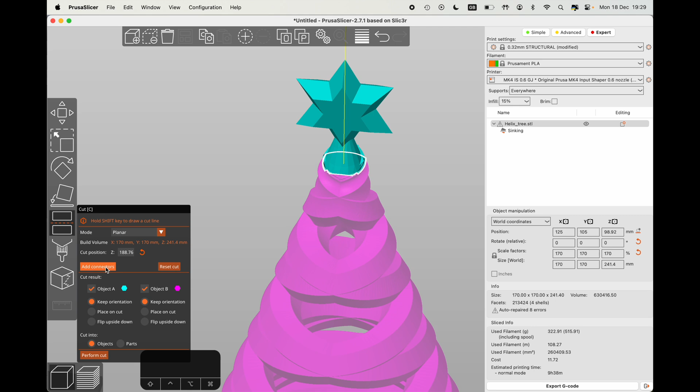You can just say add connectors, and look at this. I want to have a plug, I want it to be prism, and I want it to be square. Let's just say 3 millimeters or 4 millimeters. And now you kind of have to carefully place it somewhere in the middle. Although I haven't done it so carefully, so let's just adjust it - it doesn't have to be perfect. So we have a plug, prism square, blah blah blah, rotation.

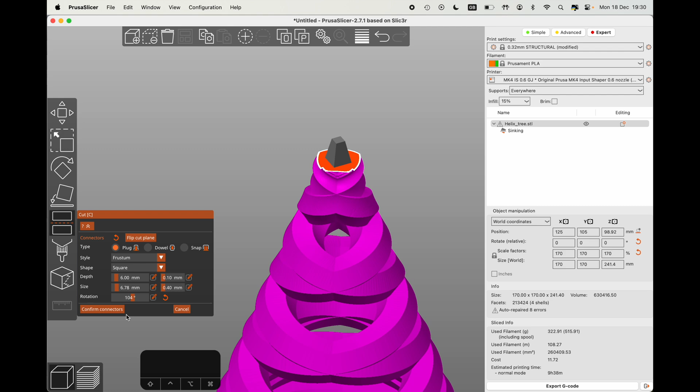What happens? Yeah, let's make it a frustum, which kind of gives it this little funky shape. And actually, let's make it slightly bigger. And go confirm connectors, perform cut.

And now we can end up with two objects. You notice the star is now no longer on the top, it's now on the side. And we can say we want these to be arranged on the bed, which is what it's done. But we could also say we only want to print the star, and if I press this icon now, it's going to place the star in the middle.

And we can print this star in a different color. Isn't that amazing? This apparently only takes 14 minutes.

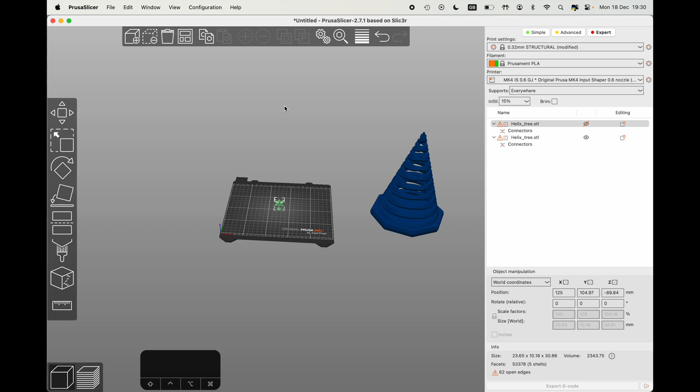So obviously you can make this change, or if you want to switch this, what I do is I press Control and this little eye icon. If there's a better way to do this in PrusaSlicer, do let me know in the comments down below, because I have no idea. This is what I do and it kind of works very well for me.

But if you notice now, we're only up to about 216 millimeters. We could make this slightly taller. Oh, and the base is back - ooh, that's not good. Let's just sink it back in. I mean, if you want to print it with the base, by all means, help yourself.

I'm going to tell you now - you're an adult, you can do whatever you want. As long as you don't hurt anybody, everything's allowed.

So now we're down to 194 millimeters. You can make it bigger. Anyway, you get the idea.

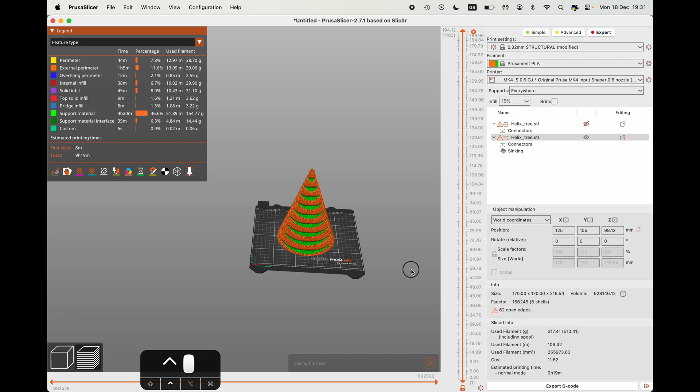So just to recap, we've made this beautiful tree from two helixes. We made one helix, we made a second helix, we joined them together, and we made a beautiful helix tree body. Then we drew a beautiful star that we can change to be whatever we want. And just to ground things up - you see what I did there? I'm here all week - I've added the base, I've added some base. And we have this beautiful model.